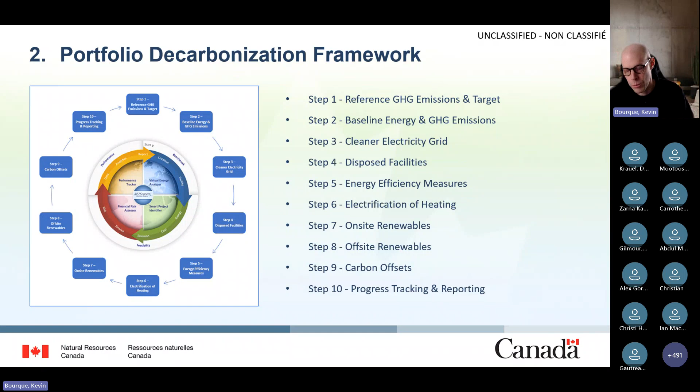Now we're going to talk about facility level deep retrofit archetypes. As I mentioned earlier, the heart of the framework are the individual facilities, that bottom-up approach I spoke about. Specifically in RETScreen, we're talking about the deep retrofit archetypes. These archetypes give a practical starting point, and we're constantly adding and updating them.

Today, I'm not going to dive into the nitty-gritty details of these archetypes. You can find some videos that we've recorded on our RETScreen e-learning channel and the RETScreen World Conference website. But everything starts with these facility level deep retrofit archetypes.

And when you're looking at the bigger picture, the overall portfolio plan, these archetypes are flexible because they allow you to change what gets analyzed. After running your analysis, you can adjust them to scale, to fit the facility.

You can calibrate them based on their actual energy consumption. You can modify them after an on-site energy audit, if that aligns with your plan. But the journey towards net zero in RETScreen starts with these deep retrofit archetypes.

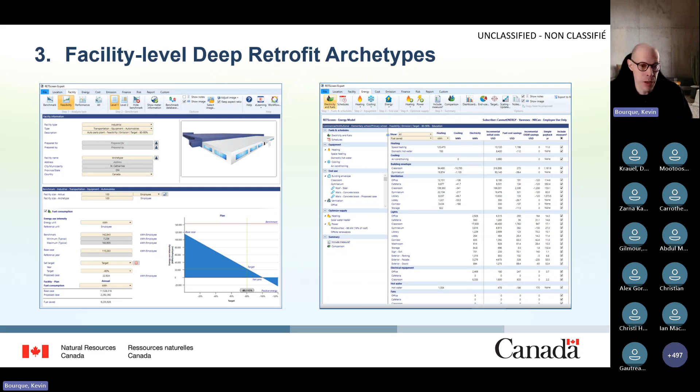So now let's talk about the portfolio-wide net zero planning tool. This new tool uses the energy modeling of the facilities we just saw and summarizes the results into various charts and tables.

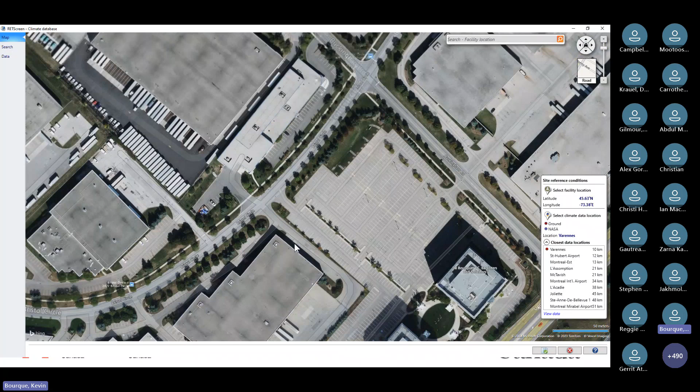So here are some two office towers. You can tell by the shadows, quite long. You can see what the roofs are like. There's lots of nice big flat roofs, lots of parking space, potential for... you can see someone was doing donuts here in the parking lot.

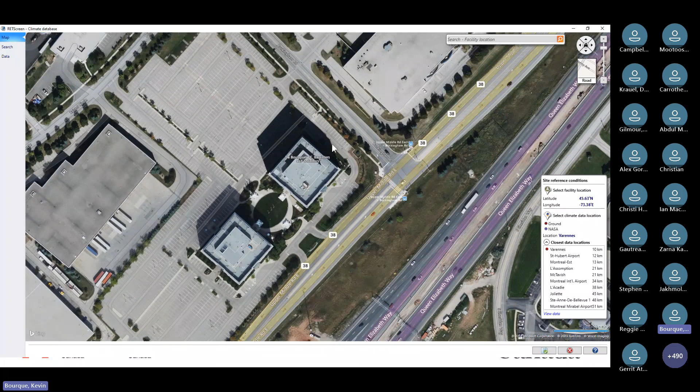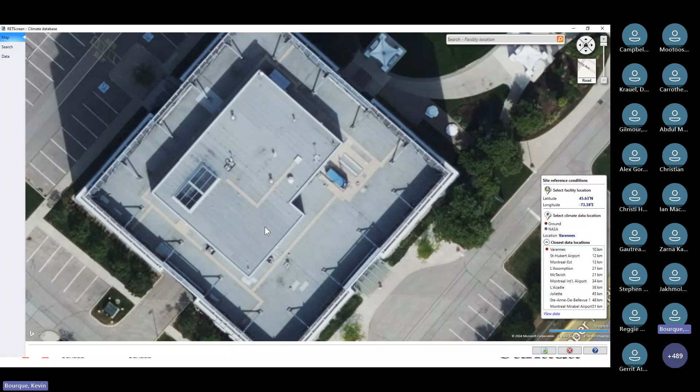But let's suppose that these are two of our facilities. So you can really zoom in and look what's actually on the roof. You can see here there's a facade on the roof, there's various equipment, and this will help us determine how much photovoltaics we can put on the building itself.

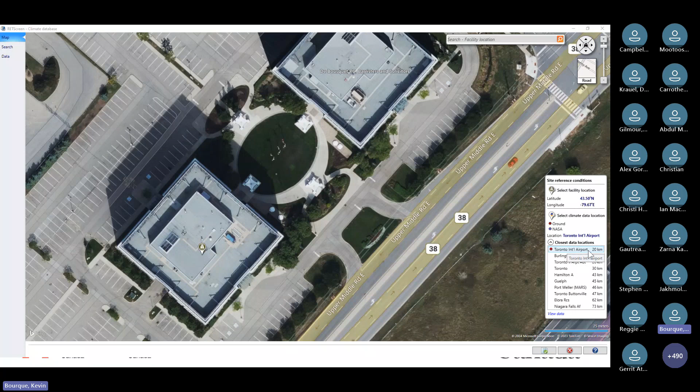So I'm going to say this is my facility, and you'll see that RetScreen, I'm in the climate database, has automatically identified that the closest climate data location is the Pearson Airport at Toronto, which is 20 kilometers away. However, if I zoom out, you can see that we're actually quite close to Lake Ontario, and I know for a fact that the next closest one, Burlington Piers, is also quite close to the water. So I think that climate data will be more representative of what I'm going to experience here at this location.

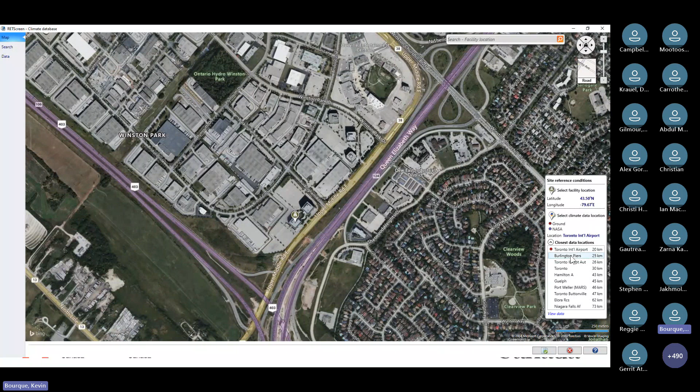So I'm going to double click on Burlington Piers, and click OK, and you'll see that this data has been updated. Now I want this to be the default. So look, I'm not actually adding facilities to my net zero plan yet, this happens down here where it says archetypes. You'll see that the archetype here says Varennes, where our research center is located.

So if I click this button here, copy to all, it's going to change this data. I'm going to click it and copy to all, yes, and now I have my location. And I'm going to do the same thing for the facility type.

RetScreen has a bunch of different facility types, as I mentioned before. For example, if I was doing this for a school board, I might want a default like primary schools or secondary schools. But in our case, we are a commercial property developer, and those were office buildings—large office buildings.

And I'm going to click copy to all. Now that's pasted. Okay, so now I'm ready to start building up my portfolio of deep retrofit archetypes. So those large buildings, let's give them a name—office complex. And there were 2 of them we saw. So we have 2.

You see here, remember I mentioned before about the disposed facilities. So if there was a plan to sell by 2050—we're doing a net zero plan 2050, so just over 25 years away—if within those 25 years those buildings were slated for demolition, or we were going to sell them, I would put how many of these two would be disposed of. In this case, we don't want to do that.

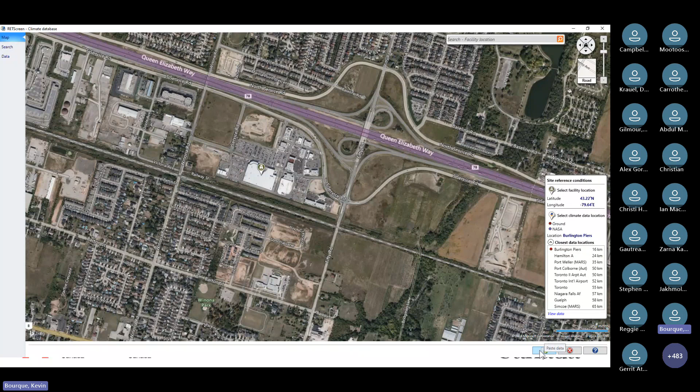Maybe it was a little bit here, in the Hamilton area, and I know that there's some large stores here. Maybe it's this store here—I think that might be a Costco, actually. And lo and behold, it's actually in the same sort of climate data location, because it's close to the water as well. So I'm going to click OK.

So you see what we've done here is we've built up our portfolio of facilities, and I'm going to click next to go to the next page on the net zero planning tool. These are the guts, if you will, of the tool. You'll see here, like everywhere in RETScreen, we always try to go left to right, top to bottom, and each of these sections has a border around them, and the names match exactly the framework we had before. If you want to reference that framework, you can click this circle that says framework. So let's go through this now and start filling it in.

The first thing it asks is, what are your reference GHG emissions and what is your target? If you have a reference, you would type it here, but I don't have any information about this commercial real estate developer—I don't know what their reference is or what they're trying to do. But let's say that they're attempting to hit a 90% emissions reduction by 2050. That's fairly typical.

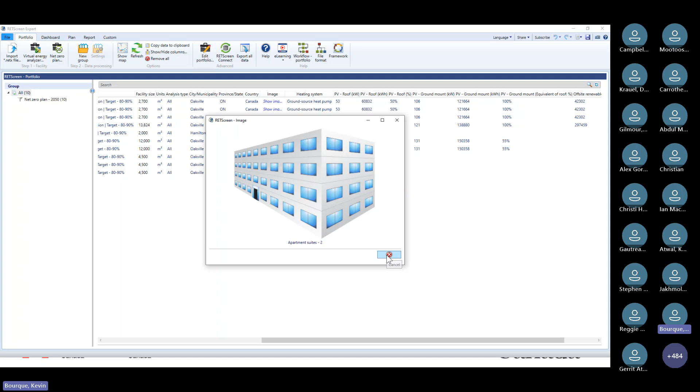You can see they're all in Oakville except this one — so it actually is smart, it knows where everything is. We can look at the image of the archetype, so we know what we're looking at, what we've modeled. It tells you what the heating system was — remember, we had some that were ground source heat pumps, some that were boiler.

It tells you how much photovoltaics is on the roof, how much electricity that provides, how much of the roof space it takes up. Same for the ground mount. How much offsite renewables were purchased, and how many carbon offsets were purchased. So everything is here.

I'll go to the dashboard just to show you that it hasn't done anything on the dashboard because this is for your own facilities. But if I go to the plan is where the analysis is done. So I'm going to close these sections here so we can focus on this plan, and it has automatically, from all that modeling, developed all these charts and tables below.

In this chart here, this is the benchmark chart, where the facility size is on the horizontal axis, and the fuel consumption. You can see the top dot here is what the base case was, and the proposed case is the empty dot below it.

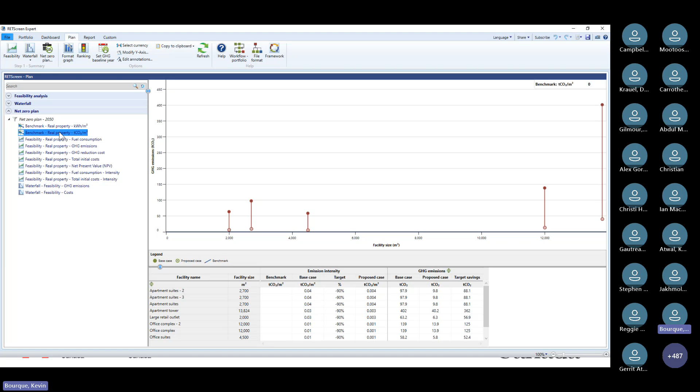And we do the same thing for GHG emissions. We can look at our emissions consumption or fuel consumption and how they've changed. So this left bar is the base case, the original situation, and the green one is the proposed case.

And if we go to the same graph but looking at emissions reductions, you can see we've managed to reduce everything to 90%, and you can see that in the table below. Right here in this column, you can see the GHG emissions, and in all cases, we've reduced our emissions by 90%.

Now, how much does it cost to reduce those emissions? Very expensive. You can see that for our apartment suites, it's almost $730 a ton. Our apartment tower is $500 a ton. Our office complex, almost $1,000 a ton to reduce. So we did it, but it didn't come cheap.

And if we look at how much it actually cost, the initial cost to do those energy efficiency measures, we can see here that just those apartment suites are over $1 million. The apartment tower is over $4 million, and so forth. So yes, we did it, but it's not cheap.

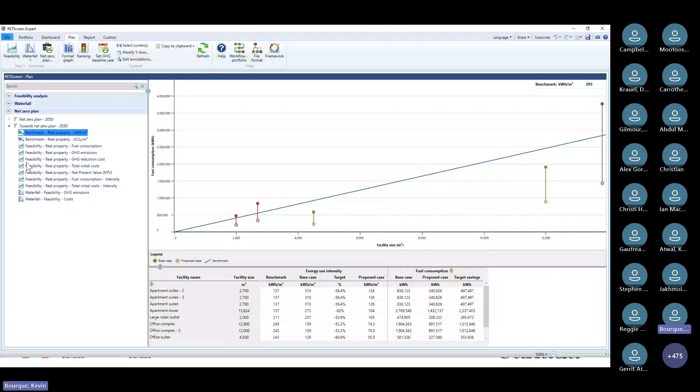Now, if I go to the plan, let's quickly go to the GHG emissions. So you'll see here that in the table below, we have that 50% emissions reduction, and you'll see that the green bar is quite a bit higher. And so we've done it. RETScreen has figured out how to calculate those GHG emissions.

And if we look at the cost this time, everything is negative, right? But remember before these were $700, $400 a ton. Now it's negative $800 a ton, negative $550 a ton. What that means is it's costing the organization money not to do the projects.

And so that's really interesting. So you can see how quickly we can do sort of a scenario analysis in RETScreen using this net zero planning tool. If we look at the costs, now look at this apartment tower. It's just under $400,000 instead of $4 million, a 10-fold decrease in the cost. And all I really did was I decreased, I eliminated the electrification of heating and looked at sort of an interim plan.

Again, the net present value now, these are all generally great projects, $1.5 million net present value. And if we look at the emissions, this is interesting. So our baseline, so why has this gone up?

Well, we're not going to 2050 now, we're going to 2030. And in Ontario, there is a plan to retrofit a lot of the nuclear plants. And so in the interim, they need to generate electricity somehow. And so the grid will get a little bit dirtier before it gets cleaner. You can see here that the energy efficiency measures take up, instead of almost 70%, they're 43%. And carbon offsets here now play a bigger role in achieving those goals.

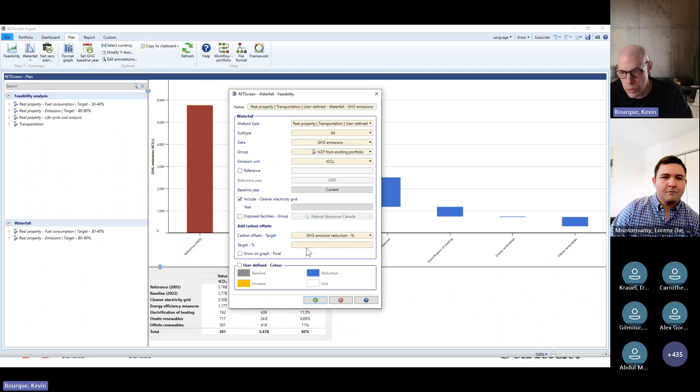Now when I go to my plan, I can create a new waterfall graph. If I go to feasibility, I can select my group, this net zero existing portfolio, and say what you want. Do you have a reference, and do you want the cleaner electricity grid, disposed facilities, and all those things we mentioned before. Then when you click OK, you generate your own net zero plan from your existing portfolio.

And in fact, if you just want to use the waterfall tool, you can actually create your own waterfall graph, your own net zero plan. For example, if you have a report that was done, a corporate report, or other software that was used, you can use this tool with your own data.

Great, thanks Kevin. We have a bunch of questions here that are very similar. So someone is asking, is there any tuning that can be done for the archetypes that can bring the projected GHG emissions closer to actual measured values?

Tuning, yeah, that's a good question. There's a couple of approaches you can and should do. One is, if you go to the file settings page, you can set your emissions database, put in what your fuels are for your heating systems, your electricity rates and so forth. Those are the basic things you would do to make sure the output is representative of your situation.

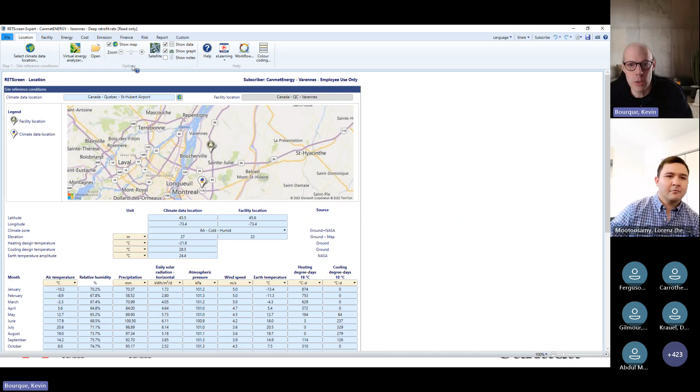Yeah, so actually, I'm sorry, I got confused here. Let me go back to my recent files, net zero. No, okay, so I'm going to open this net zero plan. Here we are, and let's open, for example, this office complex. I'm going to double click on that, and it's going to open in a separate instance of RETScreen. Here it is, okay, so here's my facility.

And so the first thing is, yeah, you're right, you do want to tune it because we used archetypes. We may say, okay, well look, the archetype says this is 12,000 square meters, but I know that it's different. So I just clicked on this scaling tool. This is also new in RETScreen, not everyone may have seen this. So I can say, you know what, my actual facility size is 20,000 square meters.

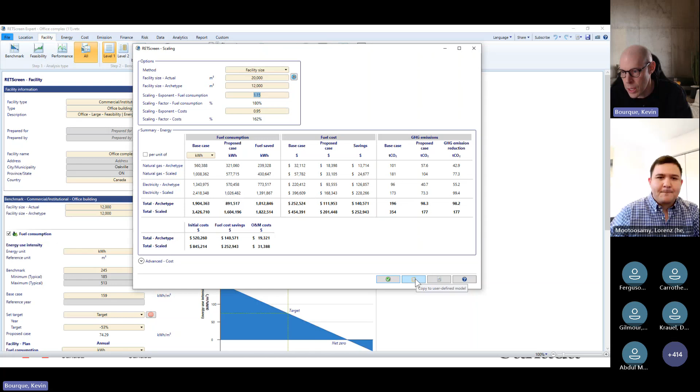And I know that my heating system is quite inefficient because the boiler is actually in the building beside it, and so I actually consume 15% more electricity than if I had it on site. But I'm going to do both buildings at the same time, and I can achieve sort of cost savings. So you can scale it up and tweak it. And when I click on copy to user-defined model, what that will do is put it in a different model in RETScreen. You'll see here, before I was in commercial institutional, now this says user-defined. Let me make this bigger. This says user-defined.

And if I go to the energy model, this is the user-defined model where I have my net zero plan, my energy efficiency measures, and my on-site renewables. So it's taken all of those systems based on that scaling.

I still haven't lost the rest of my model. So I can go back here on the facility worksheet and under the facility type, click on commercial institutional, and it will still bring back my energy model. You see I have lights and heating and so forth. And that would then be the next step, to go into the model and start calibrating it with your measured data. Do an energy audit and start making this model your own.

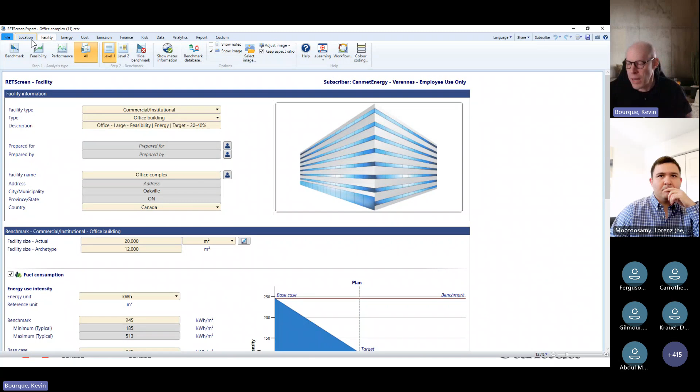There's no substitute for actually bringing in your own data, but you don't need to do that. You don't need to spend 6 months calculating and measuring things to get a plan, an idea of what you need to do.

Great. And actually a related question, Kevin, people are asking if they can customize the energy efficiency measures that are applied to each building. Because when you showed step 5 on that tool, you saw that we could only select the archetype. But can you tell us a bit more about how you would go customize the energy efficiency for each of the facilities?

Yeah, so that's a great question. So the idea here, and the idea with RETScreen has always been, get the study done. Don't let perfect be the enemy of the good, as I like to say. And so yes, use the archetypes and then go and change them.

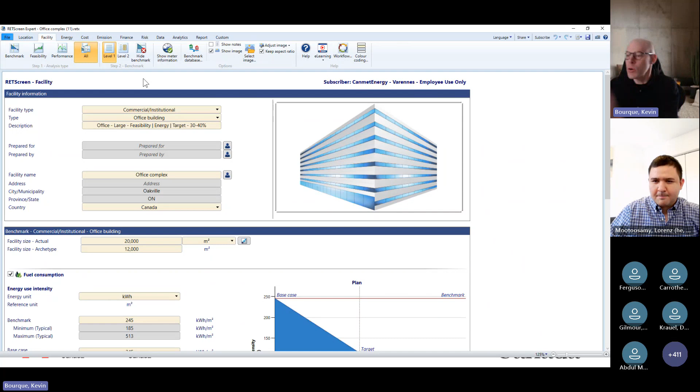So for example, we're now in this office complex, and let's say, hey, back in 2022, which was my baseline, and we had an energy audit done at the same time, I actually upgraded my HVAC system. So there's no improvements to be made. My HVAC system, my HVAC ventilation here, those have already been done.

And you know what? The roof was never designed to have photovoltaics, and the engineers would not sign off on it. I can't put that on the roof. And the parking lot is actually leased, and the owner has no interest in putting renewables there. And the offsite renewable market is tied up, we can't buy anything. So yeah, I've tweaked it.

So yeah, you can change and adjust those archetypes to match your facility. So here I've done those things. And the great thing is when I save this and then go back into the model, you'll see a pencil icon showing that it's being edited. I'm going to refresh this so it has the latest updated data. So now this facility will take those into consideration. So it won't have offsite renewables, and the energy efficiency measures will not include that for that facility.

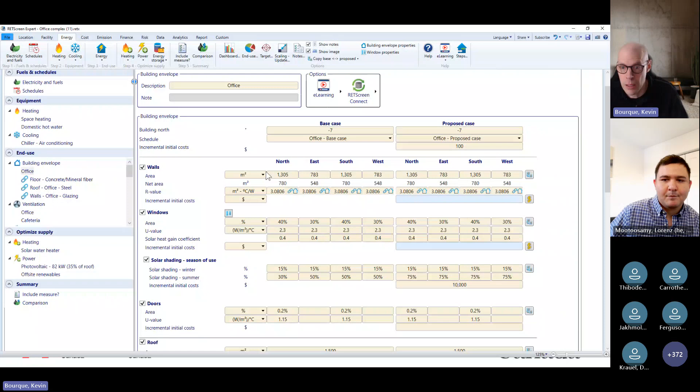No, building envelope is a huge part of it. Here's the building envelope model, and you can define for each orientation what your temperature is and when the building is on and off, and RETScreen will calculate both the losses and the solar gains, the natural infiltration, the air change rate, and whether the space is heated or cooled. You can even get down to the detail of defining the layers of your wall, how thick they are, and what their thermal conductivity is. We have a program where we're even updating and keeping it up to date. So yes, the building envelope's a huge part of the RETScreen model.

Another question here, for the financial analysis you've done for the tool, you've shown the graph where you were showing the dollar per ton. Someone is asking, is this dollar per ton of GHG for one single year, 2050, or is it cumulative? No, it's not cumulative in the sense that it's not all the tons added together for all the years, but yes, it is for the whole duration. So it's that dollar per ton for the whole duration of the project.

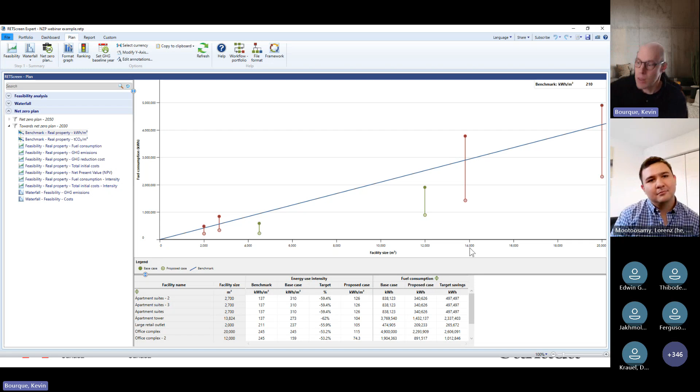Here we're looking at kilowatt hour per square meter, that's why that's a benchmark. So it's kilowatt hour per square meter, and in the table below, look at the units, kilowatt hour per square meter. So if the energy use intensity, or the KPI, some people call it energy KPI, is higher than your benchmark, it's going to flag it as red. It's more of a visual representation to say, hey, these ones are kind of not within the range that you said you wanted.

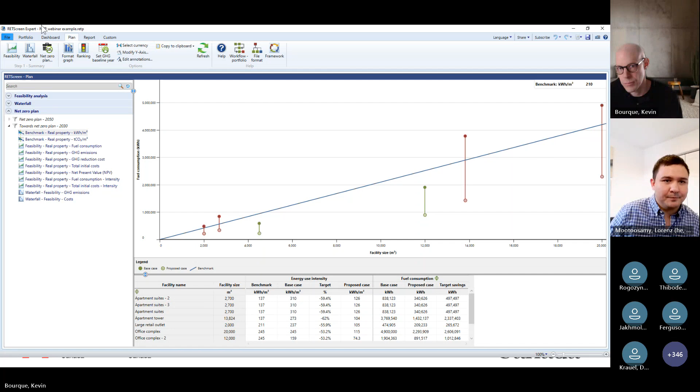If your portfolio is spread across 2 or 3 provinces, is there a way to set different climate data locations? Yeah, absolutely. That's one of the things I did at the beginning. Look, let's do one now. This one's in Hamilton, instead of Hamilton, let's put it up by Winnipeg. That building's in Winnipeg now, right?

This residential unit is in Nova Scotia, in Halifax, I have a Halifax, right? Now when I click OK, let's leave everything the same just for fun. Leave OK, oh, the name's going to be the same. But yeah, this will now be a multi-province, including multi-emission rates, right?

So it's this last one here, and you can see I have ones in Halifax, and I have ones in Winnipeg. If I open the map, so when you have a portfolio or a group on the page and you select map, it will actually show you where the facilities are. So I can see, oh this is where my, let's see what it is, my large retail outlet is in Winnipeg. So yes, you can do that.

Maybe just one last question, I see that question coming up a lot in the chat. People are asking, where do the costs come from for the measures? How is RETScreen pricing the measures that are used in the archetypes?